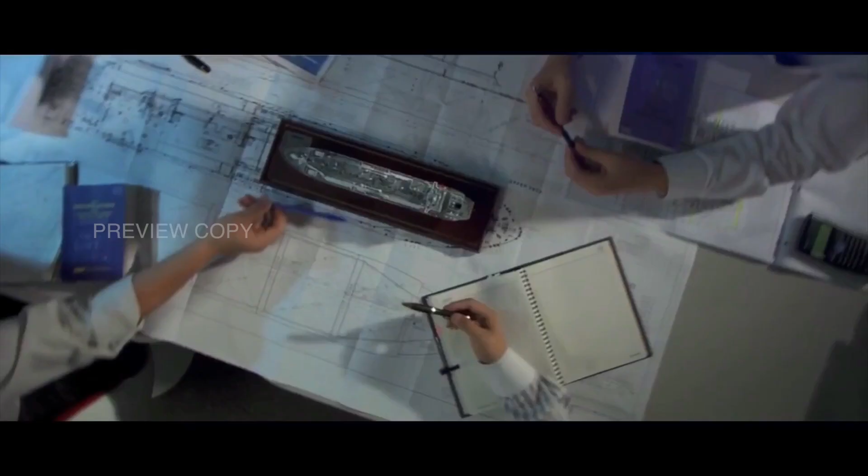Aries Electrical and Instrumentation is part of Aries Group of companies, providing complete engineering, installation, commissioning and service capability in the domain of electrical, instrumentation and telecom to the global marine and offshore industry.

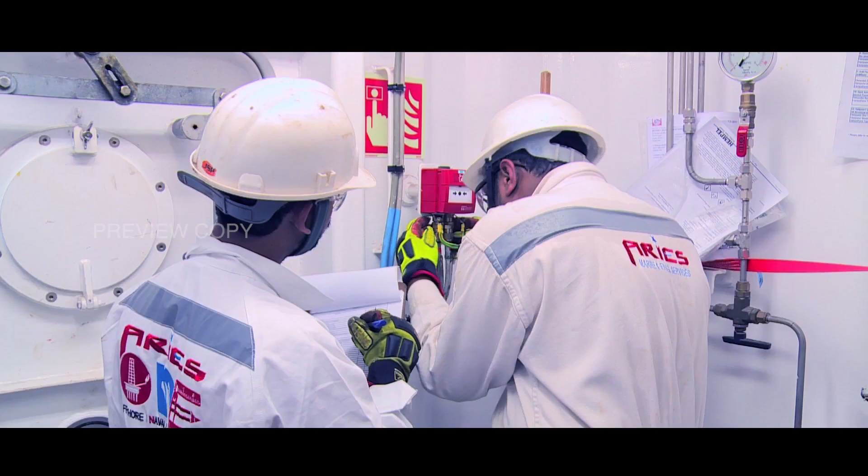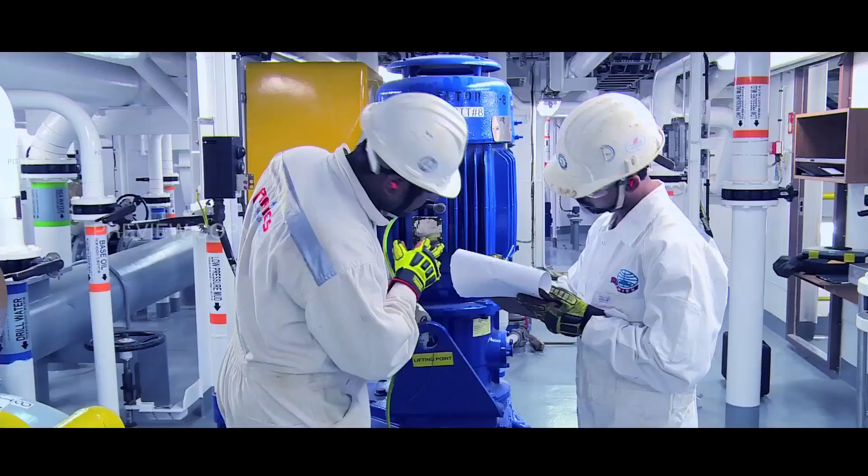One of our key strengths is the capability to perform explosion-proof surveys. An EX survey is a detailed survey that includes in-depth analysis of current or preparation of new hazardous area classification drawings and exhaustive inspection of equipment's compliance with requirements of hazardous zones. The explosion surveys by our competent and certified surveyors ensure electrical ignition sources in your rated spaces are properly contained.

To understand better, we need to know what is an explosion. Why do we require explosion-proof survey? Why is it necessary? What do you mean by the term hazardous area? How can Aries support? What rules do we follow?

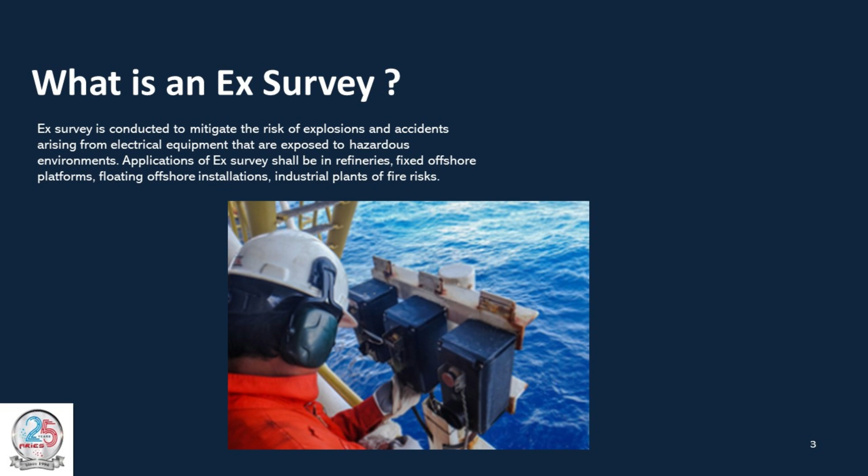Let me start by explaining what is an explosion. An explosion is an oxidation or decomposition reaction in conjunction with a sudden rise in temperature, pressure, or both simultaneously. This generates a sudden expansion of the gas volume and the release of large quantities of energy in a small space. The simultaneous existence of three factors is the prerequisite for an explosion to occur: combustible material, oxygen, and ignition source.

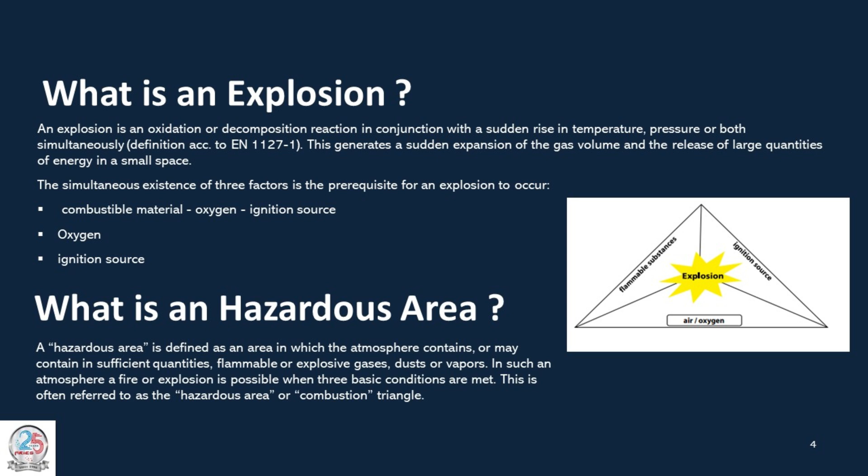What do you mean by the term hazardous area? A hazardous area is defined as an area in which the atmosphere contains, or may contain in sufficient quantities, flammable or explosive gases, dusts or vapors. In such an atmosphere, a fire or explosion is possible when three basic conditions are met. This is often referred to as the hazardous area triangle.

We at Aries perform explosion-proof surveys to mitigate the risk of explosions and accidents arising from electrical and electronic equipment that are installed in hazardous environments. Applications of explosion-proof survey shall be in refineries, fixed offshore platforms, floating offshore installations, and chemical industries.

The need for explosion-proof survey arises basically because electrical installations in hazardous areas possess features specially designed to render them suitable for operations in such atmospheres. It is essential for reasons of safety in those areas that, throughout the life of such installations, the integrity of those special features is preserved.

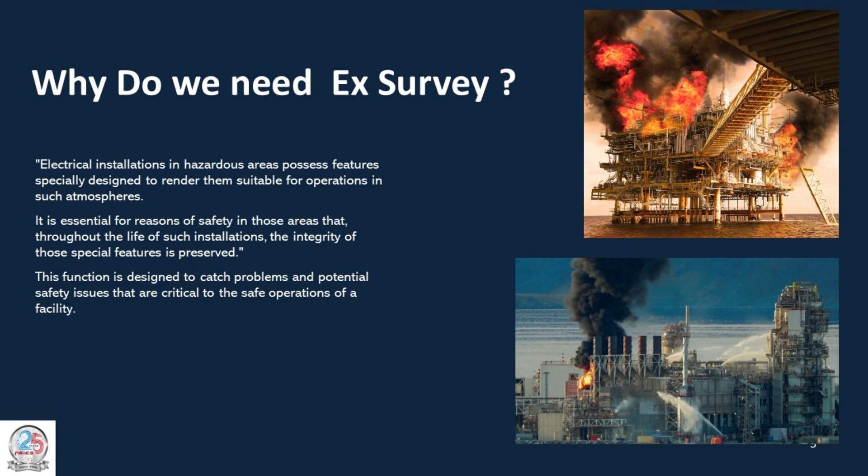This function is designed to catch problems and potential safety issues that are critical to the safe operations of the facility. The international standard we follow by default is IEC 60079-17 standard, or a variation of the standard. Other countries and organizations may have country-specific modifications, but the basic concepts and things to review are fairly common no matter where you are in the world.

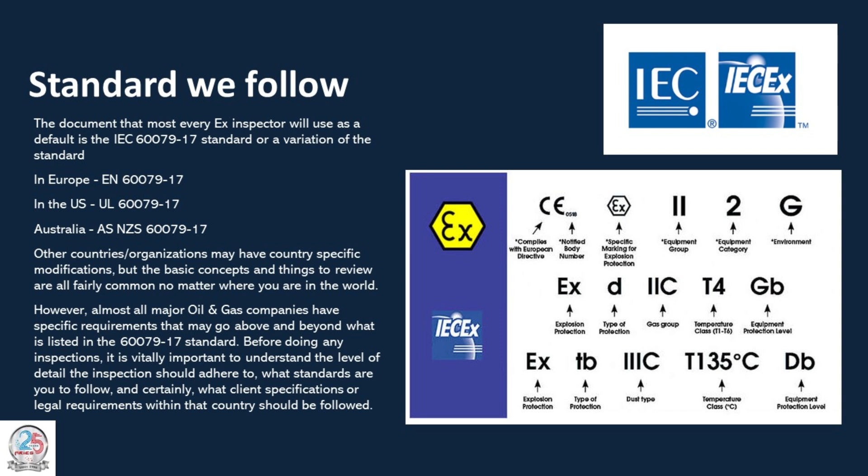Almost all major oil and gas companies have specific requirements that may go above and beyond what is listed in the 60079-17 standard. Before doing any inspections, it is vitally important to understand the level of detail the inspection should adhere to, what standards are to be followed, and certainly what client specifications or legal requirements within that country should be followed.

It is imperative to know about the below aspects before we start any explosion-proof inspections: country regulation and client specifications, information on what grade of inspection to be done, type of inspection - visual, close or detailed, drawings, certificates, hazardous area register, data sheets on all equipment, area classification, and previous inspection schedule and records.

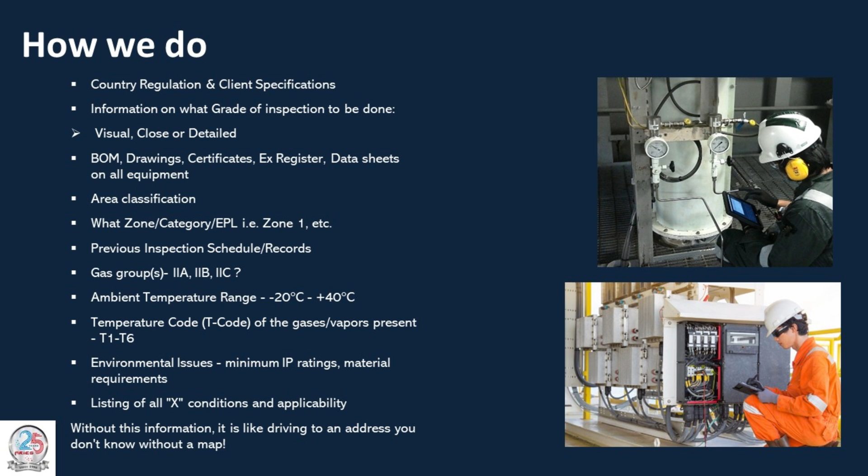Grades of inspections. Standards developed by the IEC and EN provide specific requirements regarding hazardous area equipment inspections. The standard for this is EN 60079-17 for Europe. It provides specific types, levels, grades, and scheduling of inspections as well as specific guidance for each type of protection method. There are basically three different grades of inspection.

First, visual inspection. In this type of inspection, no tools are needed - a visual overview of obvious faults and issues, looking for things like unauthorized external modifications, missing bolts, improper glands, stopping plugs, etc.

Second, close inspection. In this type of inspection, we are looking closely at things such as labels, putting our hands on the equipment, checking for tightness of cable glands, etc. Both visual and close inspections can be done without de-energizing the equipment.

Third, detailed inspection. In this type of inspection, we must go with the isolation procedure and then proceed to open up the equipment and look for internal faults.

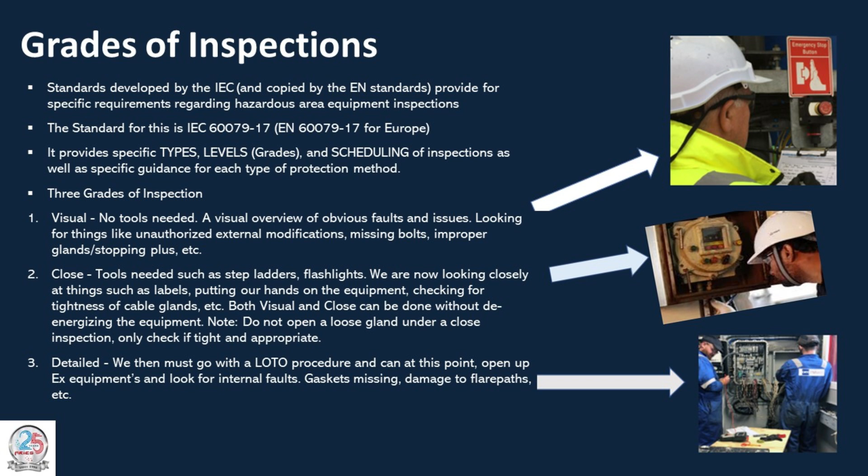Types of inspections. Before any plant or equipment is brought into service, it shall be given an initial, detailed inspection by a competent person. The inspection shall also take into account any requirements of approved wiring standards that may be applicable, such as BS 7671, IEC 60364, NEC, CEC, API. The inspection types are initial inspection, periodic inspection, sample inspection, continuous inspection, and inspection schedule charts.

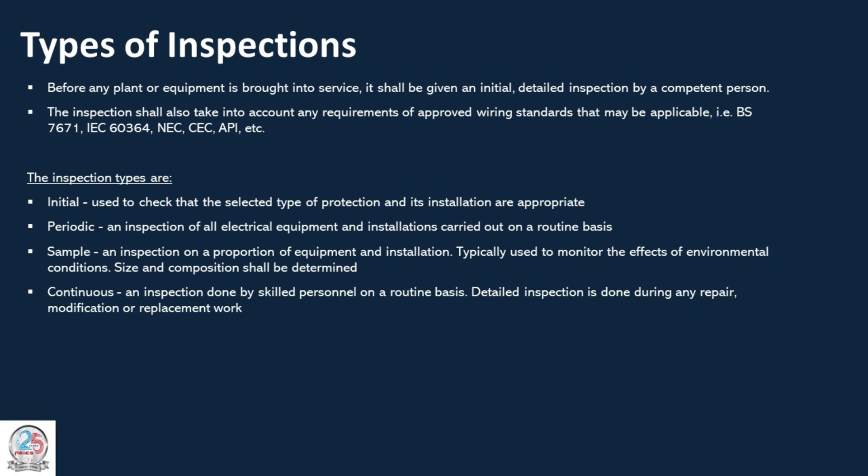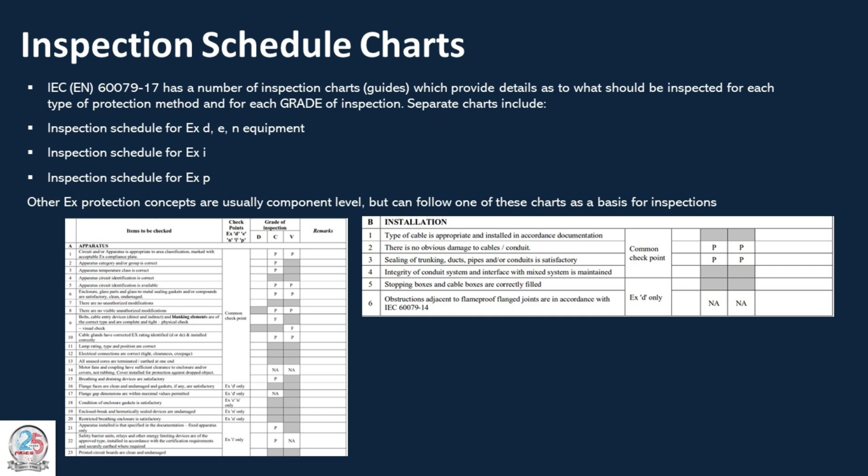IEC 60079-17 has a number of inspection charts and guides which provide details as to what should be inspected for each type of protection method and for each grade of inspection. Separate charts include conducting an inspection.

Conducting an inspection of hazardous area equipment requires careful consideration of many things: knowledge, skill and competence of inspector; scope of inspection; type and grade of inspections to be conducted; documentation availability; availability of facility personnel to assist; availability to de-energize and lock out equipment for detailed inspections; access to equipment to be inspected; types of equipment to be inspected; environmental conditions; and safety during conducting an inspection.

Safety is of the utmost priority. You are there to ensure that the equipment and facility is operating as safely as possible.

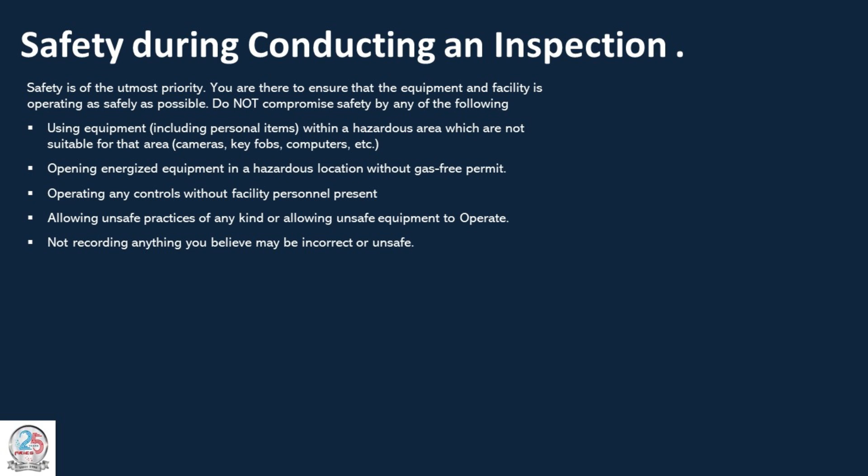Hello Aries. Hello, sir, do you take EX survey jobs for Aries? Yes, we do. Can you tell us where you require the survey? What level of inspections - visual, close, detailed? We need 50% detailed and 50% close inspection. Total equipment around 1,000. Thank you, sir. You will be receiving our proposal within 24 hours.